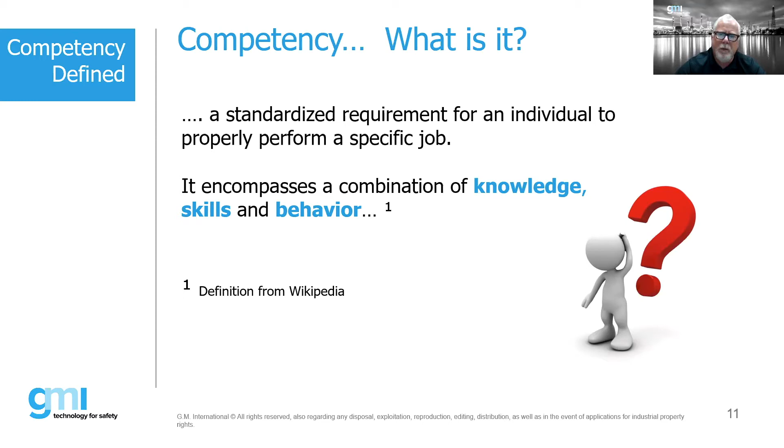Now, the assessment is usually the area which potentially raises a red flag, because does that assessment have to be done by a third party? Does it have to be done external to your organization? No, it doesn't say that. Certain industries do require that, but other industries don't.

So the assessment portion of it is usually critical, because many of you have probably been to lunch and learns from a manufacturer or something like that, or have done those, and they'll give you a lot of good information, but have you actually been assessed on what knowledge you actually learned from that lunch and learn? So the important thing is the assessment, and that could be in the form of exams, it could be practical assessments, whatever it is.

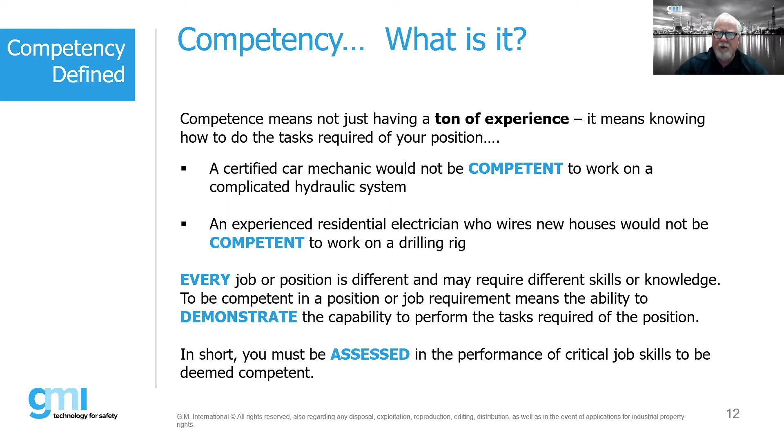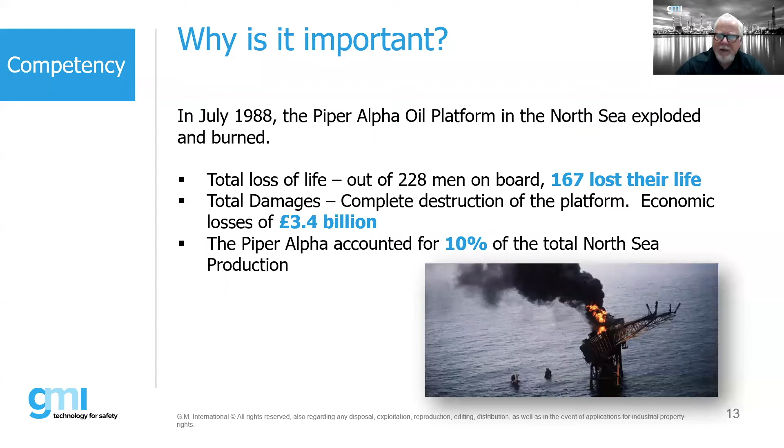So where does a lot of the competency stuff in the Ex world really derive from? It really came from the 1988 Oxy Petroleum Piper Alpha platform that exploded, and 167 people lost their lives. Piper Alpha was a wake-up call for the offshore oil industry, and at that particular point in time it was very fast and furious. But with that came quite a few changes in how the North Sea operators started to operate.

So there was an investigation that took about 2 years, and it was called the Cullen Report. You can go online and download it. After it was published, there were 106 recommendations, and every single one of those recommendations was actually implemented by industry. And one of the things that came out of it was that the employer should be responsible for the competency of its employees.

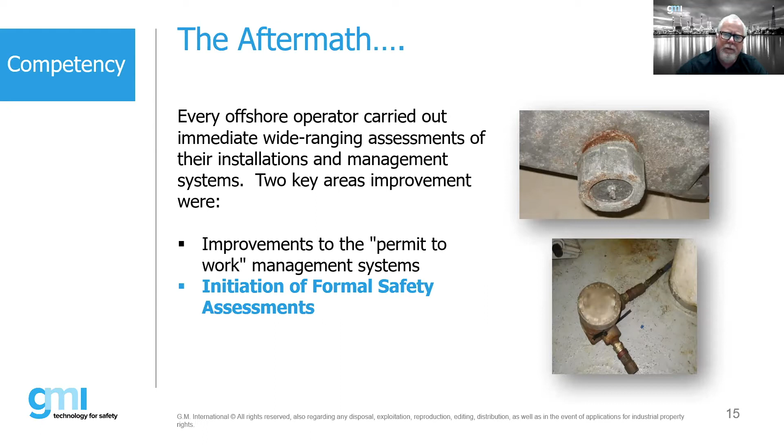So what took place? Every offshore operator carried out immediate wide-ranging assessments, improvements to the permit to work management system, which was a very important key point that came out of Piper Alpha, and then of course initiation of formal safety assessments. What was interesting is that even though the Cullen Report had come out, it was really the other owner-operators that pushed the need for competency.

So it was the remaining operators in the North Sea whose technical advisors got together and started discussing. Piper Alpha was not an electrical issue. It was more of a lockout, tagout, and responsibility of individuals doing their jobs, but it very well could have been. So all the owner-operators, the technical authorities on the electrical side, came up with the initial program, and it was called CompEx, and it started in 1994.

Now, CompEx wasn't something that was mandated government-wise, but if you wanted to set foot on a Shell rig or a BP rig in the North Sea, that was a requirement by the owner-operator. When the ATEX directives came into play, specifically the ATEX 153 directive, it really became part of the regulatory agencies. They insisted that if individuals going into these facilities were potentially responsible for an explosion or some sort of disaster, the owner-operator could be held liable. So therefore, programs like CompEx started to increase.

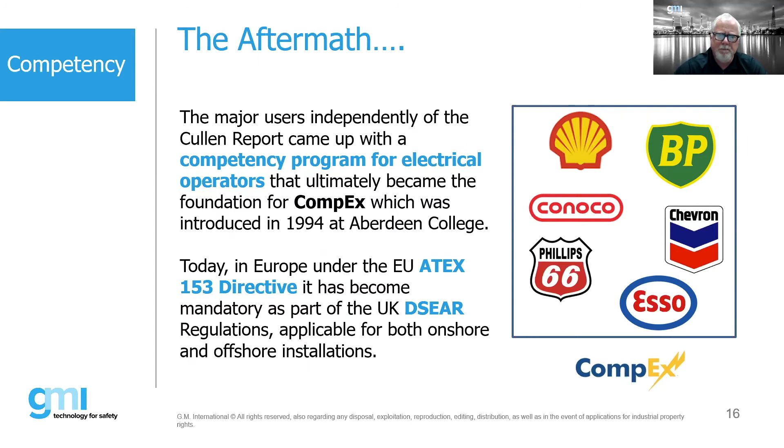Now, it boils down to where are the competency requirements defined? Basically within the 60079 set of standards, competency is really defined in two main standards, the -14 standard and the -17 standard. And it is also now in the 80079-34 standard. If you want to take a look at it, in the 60079-14 it's in Annex A. In the -17 standard, it's in Annex B. In the -34 standard, it's actually, I believe, in Section 7, if I'm not mistaken.

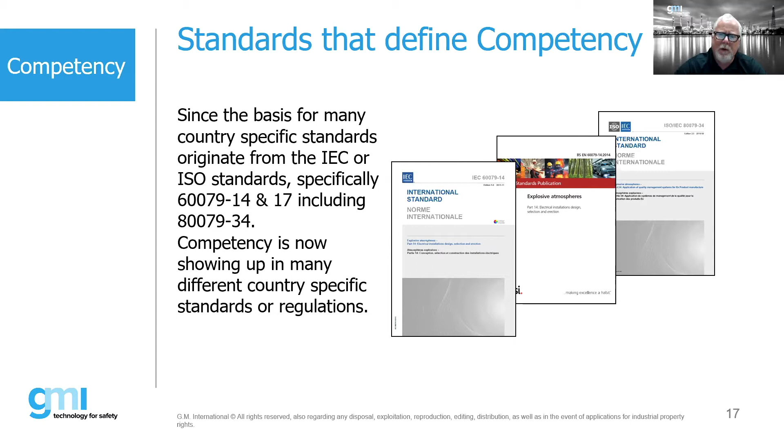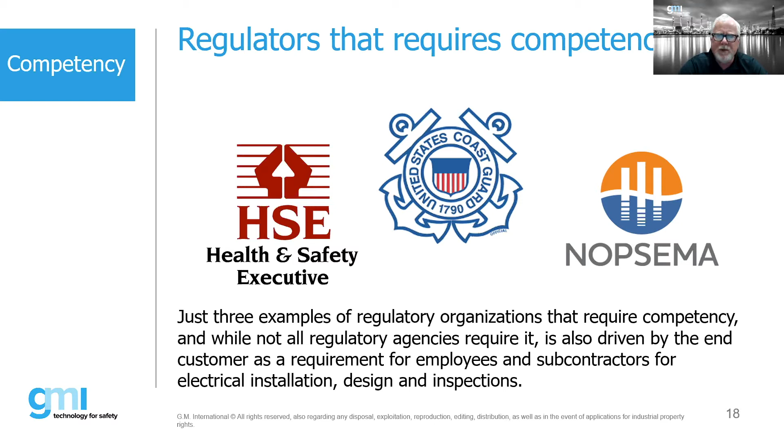So we're starting to see these competency requirements showing up in some of these international standards. Just because it's in a standard does not necessarily mean that any governmental regulation is going to insist upon it. However, what you are finding now is that governmental regulators are insisting that if you're going to build systems and comply with these international standards, then you also need to comply with the competency requirements. So these are just three examples of organizations worldwide that have now started to demand competency in their facilities.

So Paulo, if you're there. Yeah. Sorry, Bob. I just didn't want to distract everybody with my face looking at you, so I logged out. But we have a poll question.

All right, let's launch a poll. See if you guys have been following what I've been talking about here. So we have a question: what standard includes a defined specific level of competency? It's a multiple choice answer, so it means it's more than one. It's a giveaway. All right, let's see some answers.

Let's see. Okay, we have about 50% of people voted, so let's give a few more. I don't know how you guys can answer this question because the numbers are so hard to remember. I would not be able to. That's okay. How, Bob, you did it. You remember all of them. And I should know the answers to this. For sure. I hope you know the answer. All right, within a few more seconds, and then we end the poll. All right, let's end the poll and see what's happening here. All right, share our results.

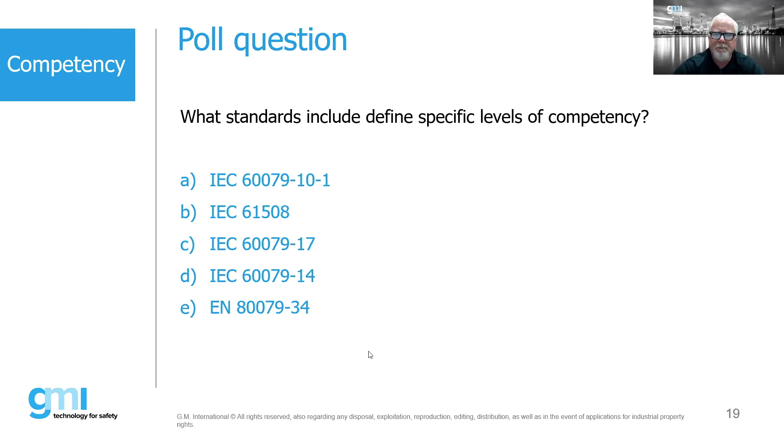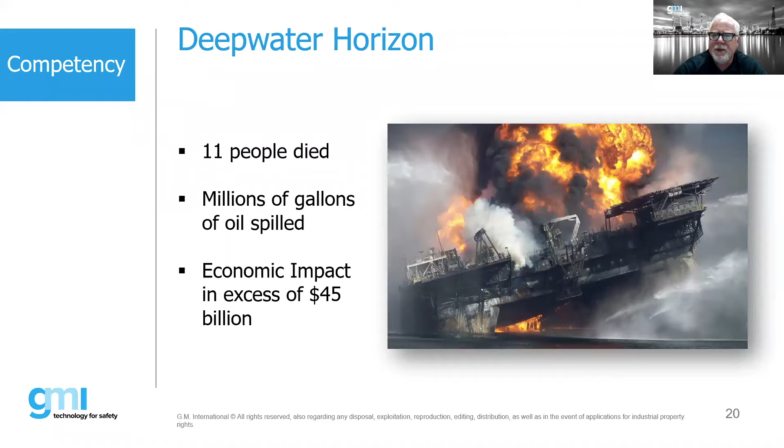So if we fast forward from 1988 and start looking at more recent history, we look at what happened here in the United States with Deepwater Horizon. The key thing is obviously 11 people died, but the economic impact was phenomenal. It was $45 billion, which is very difficult to put your head around. But obviously the environmental impact was huge. And this was also somewhat a wake-up call for the offshore oil industry.

They made a movie about that, right? I'm sorry? There was a movie made about Deepwater Horizon. Yes. And actually, for any of you who have not seen the movie, it is pretty accurate, and it's very well done. There are some little things you could pick at, but there's a lot of accuracy to the movie itself. Very scary, basically. Very scary, the fact that you can let this happen nowadays and costing so much.

Right. Not only human life, but the environment, and the cost to BP. BP, I believe they said 5 years of profit were flushed down the drain. Yeah, definitely. A lot of attention was really focused on the release of the oil, and the issues with the BOP that failed to close. And of course, it took quite a long time for them to finally close that well.

But one of the things that came out in the accident investigation report, which was basically a combination of the United States Coast Guard and BSEE, another federal regulatory agency, looked at what were the probable causes of the initial ignition. Now, speaking of the movie, what the movie demonstrated was that the engines, actually the intake to the engines, was determined to be the source of ignition. However, in the official report, the Coast Guard and BSEE said that they could not fully determine exactly what the source of ignition was.

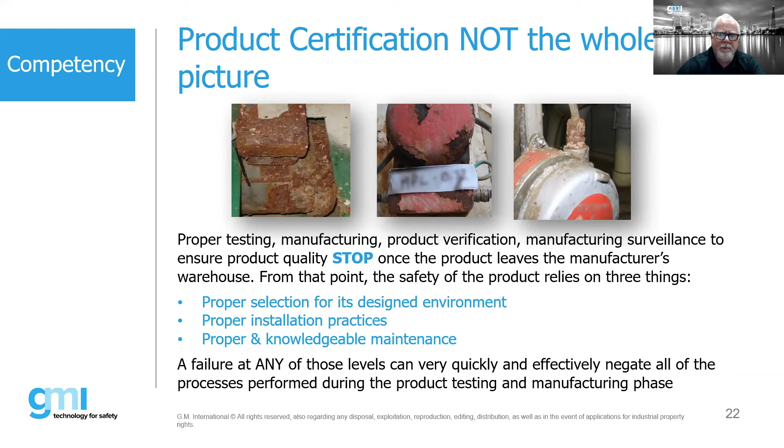So a lot of people, engineers, think that this is really more of an operational issue, right? And here's some pictures of examples of individuals obviously carrying out behavior that's probably not wise, right? I've seen worse in real life, Bob. Yeah, it's not just an operational issue, right?

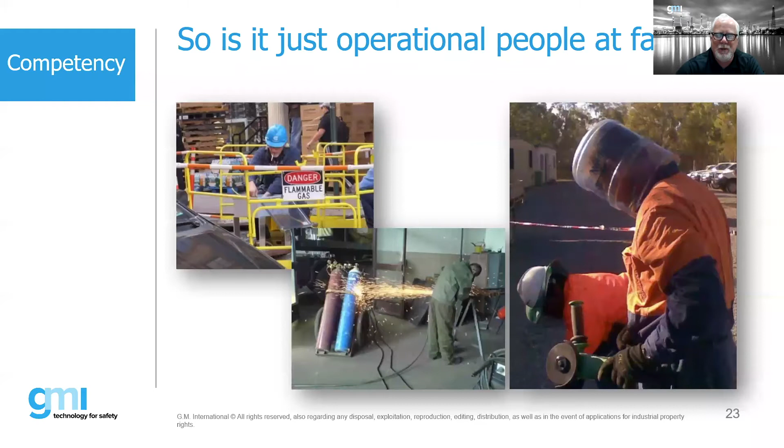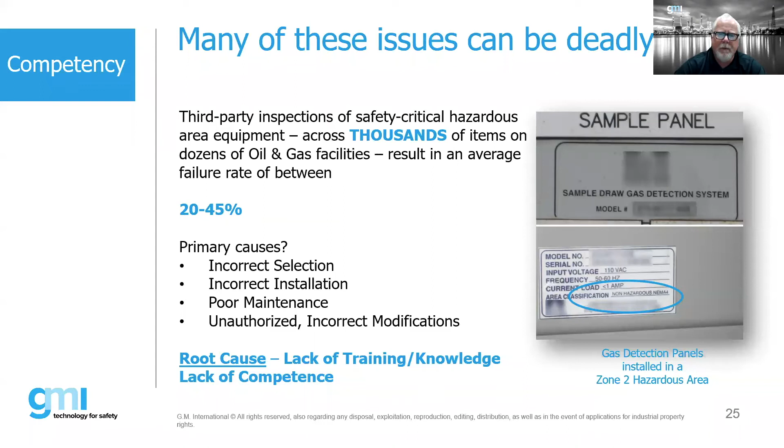So I threw this in here, Paulo, you didn't see this, but this was literally a picture I got this morning. Yeah, it's the first time I see the picture. Yeah, so we're doing an installation for this particular client. Okay. And my colleague was out there yesterday. So mind you, the plastic glands at the bottom, those aren't really going to be the glands. This was strictly doing some testing on the units themselves.

But he sent me this picture and he said, hey, Bob, what do you see? And if you see the picture on the right, you'll see a marking, EEx p IIB T3. Well, this particular project is going into the offshore Gulf of Mexico, and it requires compliance to the Code of Federal Regulations for the Coast Guard, which requires either IECEx certification or North American certification for class and zone or class and division. That marking on there is not correct, and it shows no certification authority or anything like that.

So this is a scenario where our organization is coming in to actually do an installation on the glands and not doing an inspection on the equipment. And of course, my guy is asking me, do we bring this up with the client? And the point I'm trying to make is everybody has a role within the safety of this. So as I told him this morning, please do. Let's bring this up to the client because this right now is not in compliance to what the requirements of the standards say.

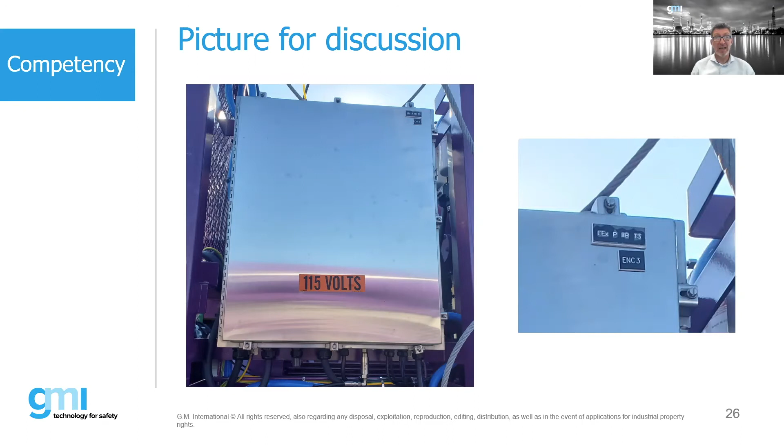Yeah, we should all, when we come across something that doesn't feel right, it's not right, we need to bring it up. Bring it up. And you can't allow something like this to go in the field and one day, boom, people die because of that. Absolutely.

All right, we have another poll here. Let me try to bring this up. Okay, let me see if this is the correct one. Okay, you guys see a poll? Yeah, okay, it's coming. What is the leading root cause of industrial accidents? All right. Well, so far, 100% right answer. Amazing how quickly some of you guys answer the poll. I have hardly enough time to pop it up and boom, boom, boom, answers coming. All right. People are still answering.

So the potential answers: operation, specification, installation, changes after commissioning, which are called modifications, design and implementation. So, okay, I think we can end the poll. All of them cause problems, but which is the leading cause? I guess most of you got it right. Right, Bob? Yep, absolutely. Well done. Specifications. Yeah, as we said earlier, specification has a real problem.

We spend so much time and money selecting the best product, but we also need to know how to use it. And also, we come across so many instances where you go to a customer and say, well, have you done your analysis, your impact analysis? And they say, no, we just need everything SIL 3. Okay.

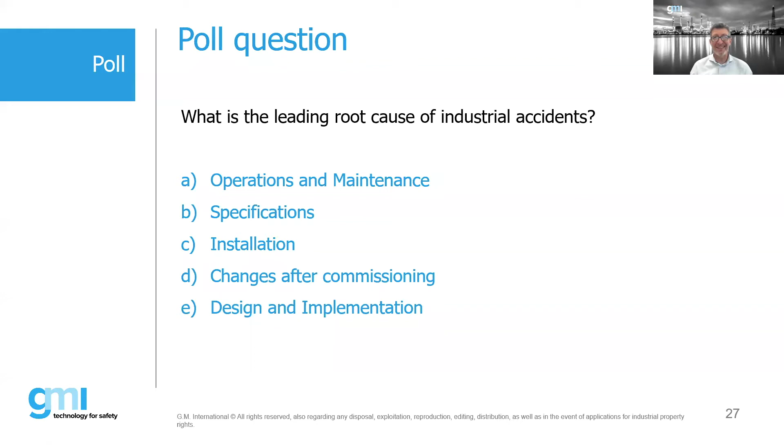If you don't, anyhow, let's go.

So what specifically on competency do the standards say? So if we pull up 60079-14, in Annex A, it defines the knowledge, skills, and competencies of 3 different people, if you will. We have a responsible person, that could be a project manager, a project engineer, the operators and technicians, which are typically the people that are installing the equipment, and then finally the designers that are responsible for the design and selection of the equipment. So it's basically divided into 3 different roles.

And within those roles, it tells you specifically what that individual's knowledge should be and the skills, if you will. So things like understanding of relevant electrical engineering, ability to read and assess engineering drawings, understanding general principles of explosion protection. If you notice designers versus operator technicians, the one big difference is that under operator technicians, it says understanding of general principles, where designers, it says detailed knowledge of the general principles.

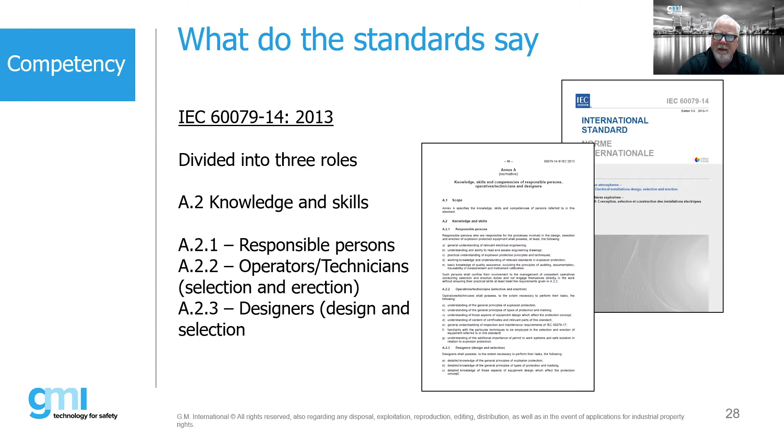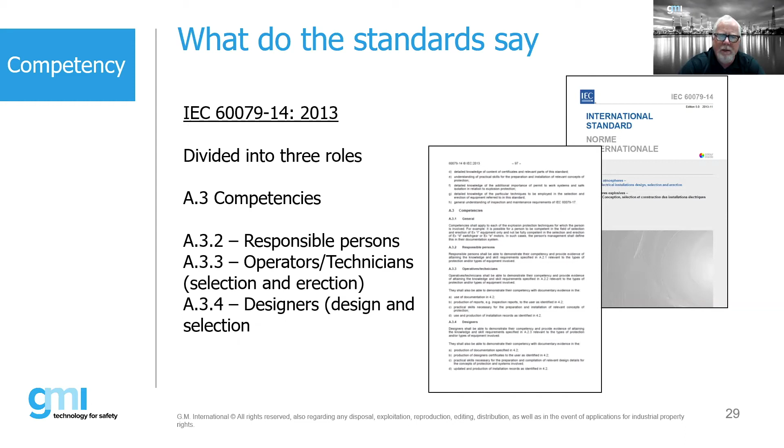So designers have a higher level of responsibility. Therefore, we expect designers to have a higher level of knowledge. Things like lockout, tagout, tryout procedures, that's really not going to be part of designers. That's going to be more of the operator technicians. So it's basically defined. When we go to the next, for competencies, it basically tells what are the competencies required. So these are all listed, again, for those 3 different roles.

And then finally, there's an assessment. And as I mentioned very early on, the assessment is usually the area in which people kind of question, what do I need to do? But basically, the standard says it shall be verified and attested at intervals relevant to national regulations or standards or user requirements on the basis of sufficient evidence that the person has the skill, can act competently, has the relevant knowledge and understanding. So we basically have more or less put that assessment process in the standard as well. And this information is exactly the same as what is listed in the -17 standard, the inspection standard.

Now, this is actually edition 2 of the 80079-34 standard. This applies to manufacturers of Ex equipment. And why this was brought into play in edition 2 is that a lot of auditors were going into facilities of people that were manufacturing Ex equipment, and they were finding that even the manufacturers themselves were doing things wrong. And so this clause was actually put into the latest edition, edition 2, on competency. So it says the organization shall determine the necessary competence, ensure that these people are competent based upon education, training, or experience. What actions are we taking? And then retain our documentation.

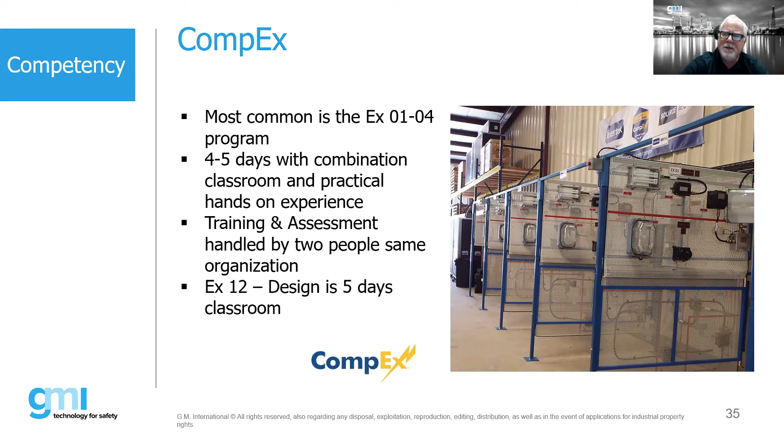There are 52 centers located worldwide. Most of them are located in the UK. They're owned and operated by JTL. The centers are actually run by third-party organizations. So they could be folks like Intertek. There's various organizations that run CompEx. All of those organizations are vetted and audited by JTL, and JTL determines the course content to be delivered by the third party.

One thing about CompEx is the course materials, if you will, even though they're done by each center, they're all based upon the same relevant standards and documentation. And again, they're vetted and audited by JTL. So sometimes people will ask, is it better to go to one CompEx center versus another? The materials that you're going to find are going to be virtually identical. The layouts of the bays, all of that good stuff. So it really comes down to who's your instructor, the cost, the convenience, all of that good stuff. So CompEx is very consistent amongst all the centers.

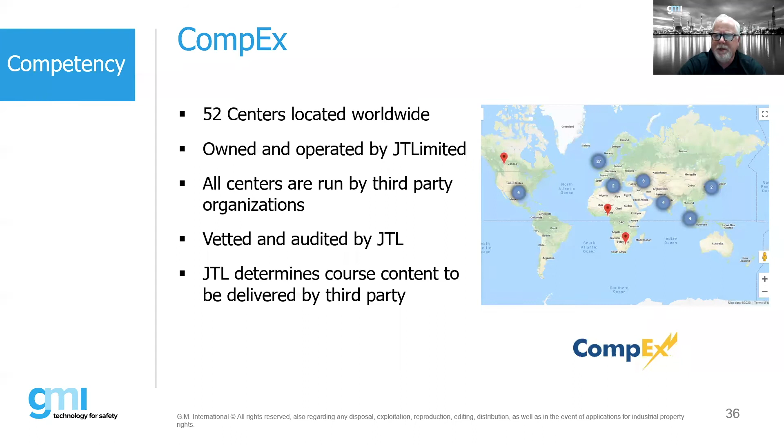Under the IECEx Certificate of Personnel Competency, there's actually 10 modules. So you start off with 000 and work your way through. And you'll see when you actually compare modules under CompEx versus the IECEx, there's an awful lot of overlap. So I won't go through all of these right now. We'll talk a little bit more about some of them later on. But basically, the main one that everybody really needs to take if you start off is the 001, which is your fundamentals course. And then you can kind of pick and choose depending on what you wish to achieve. Or you can just finish with 001 and be done with it.

So how is this run? So an IECEx certifying body can apply to become a certifying body for the CoPC scheme. So 15 of the IECEx certifying bodies have gone through that, and you can go to the IECEx website and you can see them. They're listed right there. It's similar to product certification, not exactly, but the ExCB assesses the candidates. So just as an IECEx certifying body assesses a product, they are also responsible for assessing the candidate as well.

Now there's another step in this whole thing. There's also what is called an IECEx recognized training provider, and this is fairly new within the IECEx. So there's currently 32 recognized training providers. We are one of them. They're located worldwide. They're vetted by the IECEx to deliver the course content around the IECEx scheme.

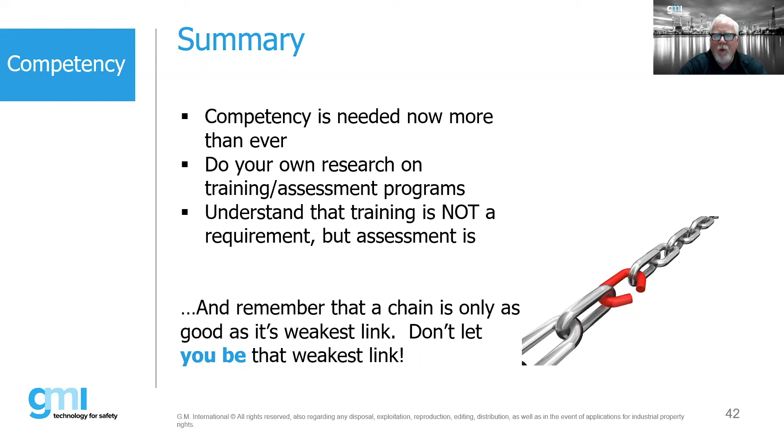Yeah, and Bob, let me mention that in cooperation with you, GMI will start hopefully soon to run these courses. But we have a question already. Do we have personnel competency training in India? I don't know. Maybe soon. Yes, I believe there is.

Well, and here's the thing, just as more of an FYI, and this isn't true for all organizations, but for example, here in the States, you can actually contact one of your recognized training providers, and they may be able to come to your location, depending on which modules you want. So for example, we did one in December for a client up in Canada, where instead of having all those folks come down here, I ended up traveling up there, so it saved a lot of money, a lot of time. So there's ways that you can actually do this mobile, and there's discussions about doing it also virtual during this age of COVID.

We will try to do, Bobby. We will try to run this course at different locations, but also at the same time, as we do for the functional safety courses, to have a course. We call it in-house courses. So if you guys want, we can come to you. Of course, you know, we need a few people to make it worthwhile and not cost a fortune for you guys.

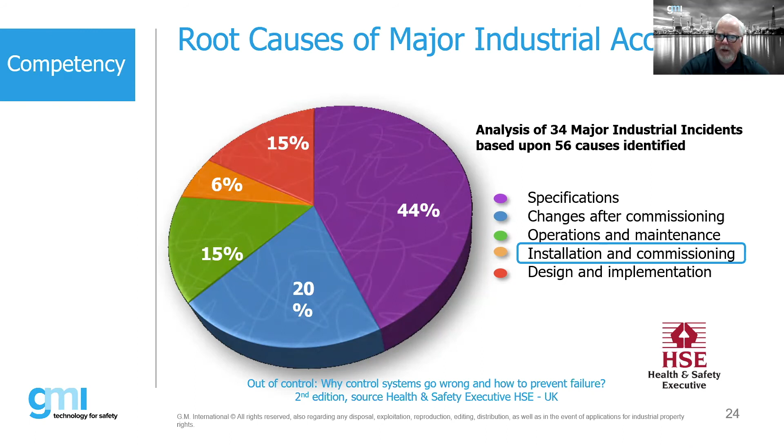Okay, well, we'll soon move to the answer to the questions you posed during the registration. I have a question here that says, will this 44 standard, 79-44, be out for 2021, or what do you think? It did get pushed back. The committee chairman for that is a gentleman by the name of Marty Cole, and he's with Hubbell up in Canada. I've reached out to Marty, and the last I've heard is that they are looking to publish it in May. So we'll see. I wouldn't hold my breath, but we'll see.

All right, so Paulo, I'll stop sharing my screen. You want to bring up your screen? Yeah, I should do so. Well, let me see if I don't mess this up. Okay. Okay, so we received several questions during your registration. We prepared answers to that. All right, Bob, do you see my screen? I see your screen. All right, so let's go to the first question.

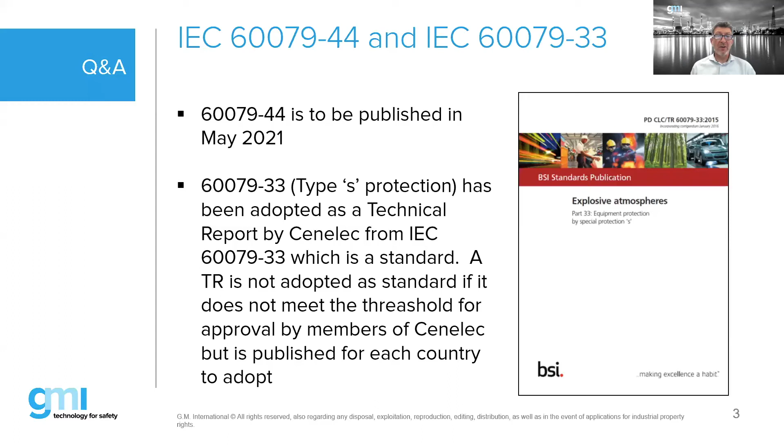So it was not adopted as an EN standard, but it was adopted as a technical report by CENELEC from the IEC. So it is not officially an EN standard, but it is adopted as a technical report. And technical reports and technical specifications are, in many cases, precursors to standards, or in the case of technical reports, typically they're informative. They usually provide additional information on how to achieve it, and they're not necessarily going to become a standard. So the question is a good question. I don't really have a good answer. Well, no, I believe you answered quite correctly. Let's go on to the next one.

Okay. I'm a designer interested in the IECEx CoPC module. Which module would you recommend? Because as already discussed, there are many modules. Right. So the Ex 001, the fundamentals, that's pretty much a prerequisite. There is one module where you don't have to take 001, but you would have to take 001 for pretty much all of the other modules. The other module I would look at would be the Ex 009, which is the design course. We actually offer that as a back-to-back. You do the 001 in about 2 days, the 009 is about 2 days, so you get that all completed in about a 4-day time frame.

I guess it much depends where you are, what type of engineer you are, if you are an end user, if you are an EPC. Now, something I didn't mention, but this brings up a point. If you go through these training programs and you have the knowledge, remember, competency is more than just knowledge. It's also your experience. So for the IECEx and the ExCBs, there is no prerequisite for 001.

For 009, the prerequisite is to take 001, or at least be deemed competent, but also in order to get an IECEx certificate, you have to prove that you've actually put that type of stuff in use. Meaning that, have you been designing Ex installations for a year, 2 years, 3 years, 5 years? So part of getting your CoPC is not just going through the training and being assessed, but it's also providing

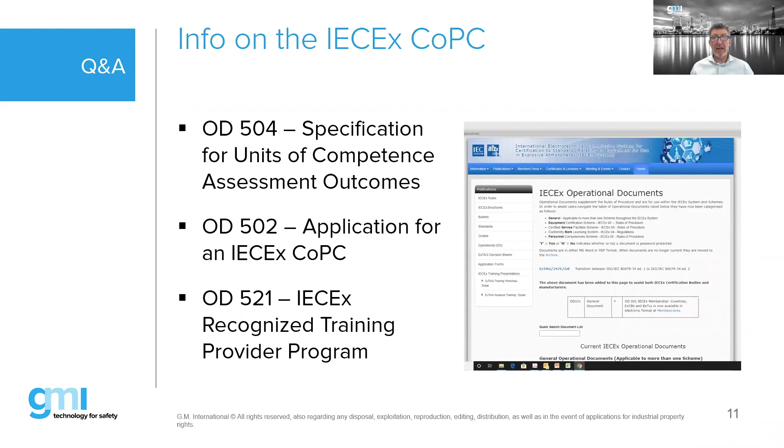And somebody, Anandan, is saying that in India it is mandatory. Very possible. Every country has its own rules. I know, for example, in Norway they have strict requirements also. They do. I cannot speak for India. I've heard anecdotal evidence about the IS standards in India. I've read them. I haven't seen anything that mandates it. So I really can't answer that question.

I don't know. I know India is more and more adopting some of the IEC standards as Indian standards, like what you see in places like Brazil, where they've adopted the IEC standards and turned them into Brazilian standards. And you're seeing that in various other parts of the world. So I would expect that over the next couple years, you're going to see more and more of this competency requirement adopted in country-specific standards. If it's not an IEC standard, you'll see it in there.

As a matter of fact, here in the United States, we've adopted the 60079-17 inspection standard, and we have now put in there the competency requirements. However, what's interesting is that the IEC standards say shall, which means you must, right? In the US version, we put should. There was a lot of pushback on shall versus should. So it really, again, falls to the authority having jurisdiction. You have to know English to understand the difference, of course.